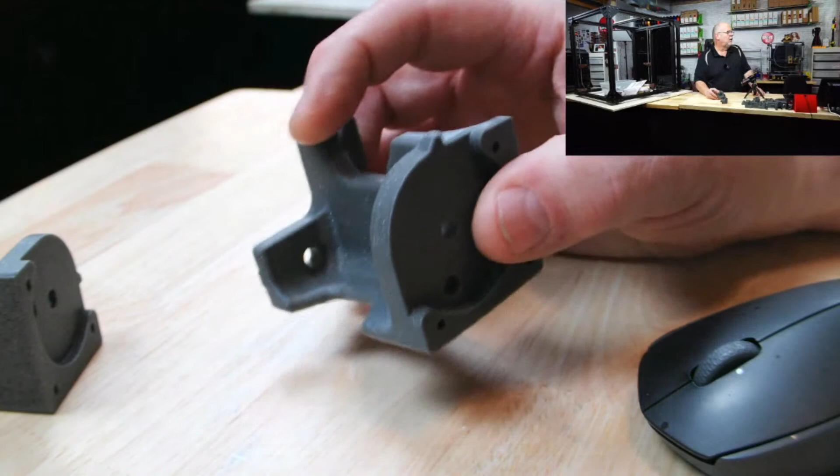Okay, looks pretty good. Took an hour and 20 minutes to run this piece. This is at the standard Voron infill and perimeter settings, etc. Now, the only thing I'm not 100% happy with on this is the first layer could have been a little bit better. This part's still usable, it's fine, but there's just a few little artifacts around the end there.

So I turned off the calibration prior to printing on this one because I figured it was all calibrated from all my test prints I've been doing. And you know what, I should turn that back on, but that's not bad. So there's your first layer. And otherwise, this part looks pretty decent off of the K1. So if we have that one off the K1 and that one off of the Bambu P1P.

I'm happy with both of these parts. Other than the fact that the Bambu took some stuff off of the bed, but I did recently get in a new bed for the Bambu, which is the high temperature plate.

Which is good for PLA, PETG, ABS, TPU, PC, and all that. And then this is the engineering plate, which is also good for PETG, ABS, TPU stuff. So I'm going to probably use this so I won't have any textured PEI coming off of that plate. That should work fine.

But the point is that the Bambu with the enclosure is running ABS just fine. All of these parts you see in front of me, other than this one, were run on the Bambu with ABS, Polymaker ABS filament, and it runs just fine.

So what we're doing is part of this without some printed parts, so it's like a 3.2 upgrade. It's a few modifications. If I put this on here and show you up in this corner, the front idlers are done like that with no printed parts involved. And this is the other front idler. I'm going to try and focus on that for you. So those are done and ready for the belts to go on.

The other parts we've got finished on this is the X gantry is done. It is done, deracked, and it's running slicker than owl poop.

So what we're going to work on tonight is the XY motors up here. We need to get the idlers in and get the motors on, et cetera, et cetera. So I always seem to have something to build.

Well, I create projects too. If you look back here, this is the Trident that we built in multicolor, which has been stripped down to the bare frame now.

So we're rebuilding the Trident because we're printing it in different colors. I think I've decided I'm going to do gray, and the accent color is going to be white. That's going to look really cool, a gray and white printer.

And we're doing the reverse, or upside down, whatever you call it, electronics. So the electronics are going to be on top instead of underneath. We're going to be making a few different things.

This printer isn't enclosed. I could enclose the RatRig if I want, I have the panels to enclose it. The back panel is already on because the electronics go on the back. You can get a hat for this, and you can enclose the sides, but I don't think I'm going to enclose it.

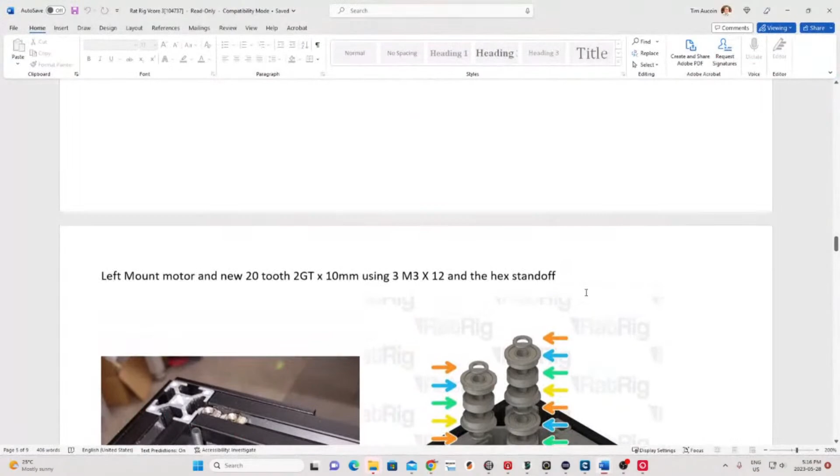Hello, hello, okay, so we're going to be working off of this. I go to this... oops, that's the wrong thing. I am looking for... right here. So this is the little assembly manual that David Wilson had put together for me. How do I zoom out of this? This is in Microsoft Word. There we go.

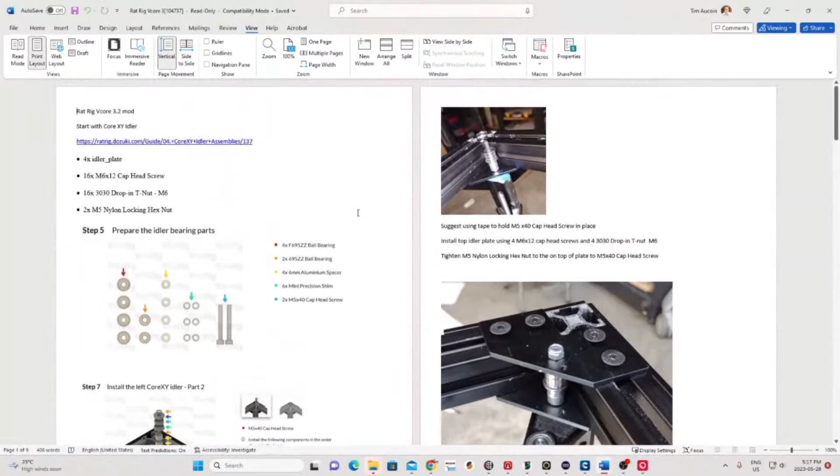So this is kind of the little manual that he put together for me on the 3.2 modifications, which basically, so we've got this part done. This part over here you're seeing on the right is already finished. Those are our front AB idlers, or our XY idlers, I call them the AB motors anyways. Those are the front idlers, left and right, are already done, okay? And now we're going to be working on the XY motor plates, the XY motors, which are the back ones.

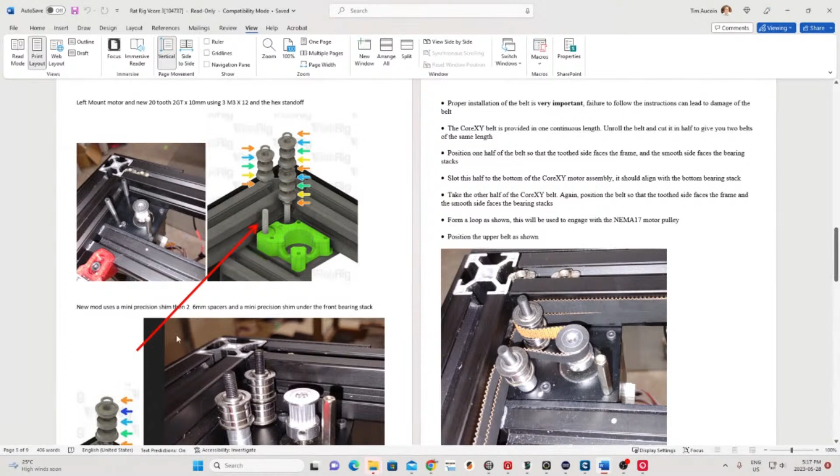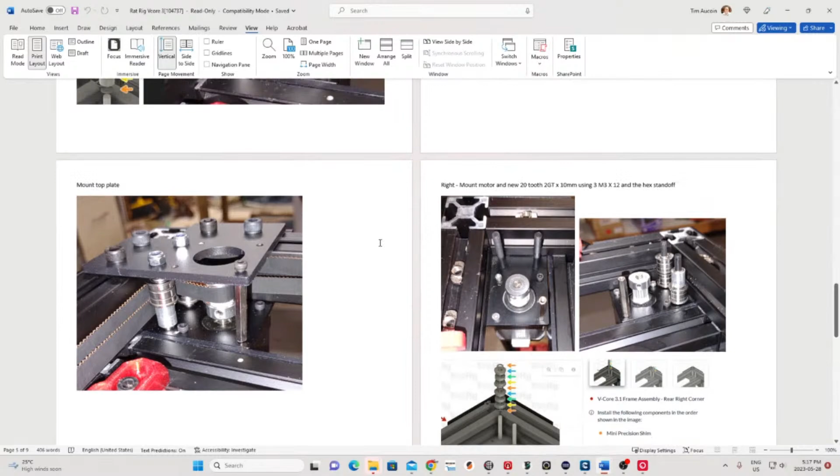So you'll notice that this picture on the right with the red arrow pointing to it, that printed part is no longer going to come into play. That's kind of replaced, and it's going to end up looking like this one here. And then it's much easier to run your belt path, et cetera, because you can run the belt and then put the top plate on. So there it is with the top plate on and the belt run like that. And that's how we're going to be doing our XY motors and belt path there.

So we're going to start working on that guy. Let's see, accent parts, probably okay, yeah I think they would be okay, but unfortunately I don't have any. Man, I thought I had white. I do have white PLA, but I don't think I want to do accent parts in PLA. I have PETG in white from Polymaker, but no white ABS.

Interesting, okay. So without further ado, these are the parts that we need. That one and this guy here. These were parts that I purchased off of AliExpress. These plates basically replace the printed parts that normally go on here.

Now, I'm totally winging this because I had to order some spacers. So we got a whole bunch of different spacers. And while I was ordering spacers, I ordered every kind of spacer under the sun you could think of. So we have a bunch of spacers.

We have our new idlers here. We ordered a little different size idler, our geared idlers, sorry, geared teeth idlers. And then let me get all the spacers out of here. We have our new belt from our 3.1 upgrade kit. So we have some new belt material here as well.

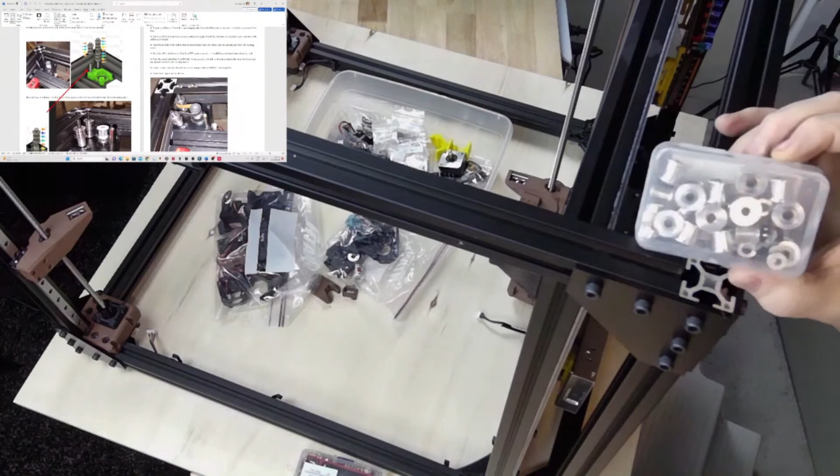But for the most part, you're going to reuse a lot of the idlers and bearings from the original build, because they did not include new idlers and bearings in the upgrade kit. I don't think they did. Let me double check that to make sure I'm not being a liar here.

But yeah, these are all the parts. This is for the EVA, the hot end. And I've got to decide what I want to do specifically on this hot end.

And then all the rest of these things are all the old screws from the old build I kept, even though they do include a lot of new hardware in the upgrade.

Actually, we did get new bearings - sorry, we did get new bearings. These are the flanged 695ZZ bearings. But the idlers are pretty much the same. So we have some new flange bearings and some new 695ZZ unflanged bearings.

And then we got a lot of new bolts and screws, which they don't really tell you which ones you're going to replace, but it doesn't matter - bolts are bolts and screws are screws. So yeah.

A lyre is a very pretty little harp. Oh, I see what you're saying there, Andrew. That's right, you're my comedy relief on the channel. Andrew, keep it up, keep it up.

So I am going to pull up and have a look. I need to zoom in - let's go 200% on this on my screen so I can see exactly how he has done his bearing stacks here. Now I think I'm going to have to fiddle with these a little bit, but we'll see what happens.

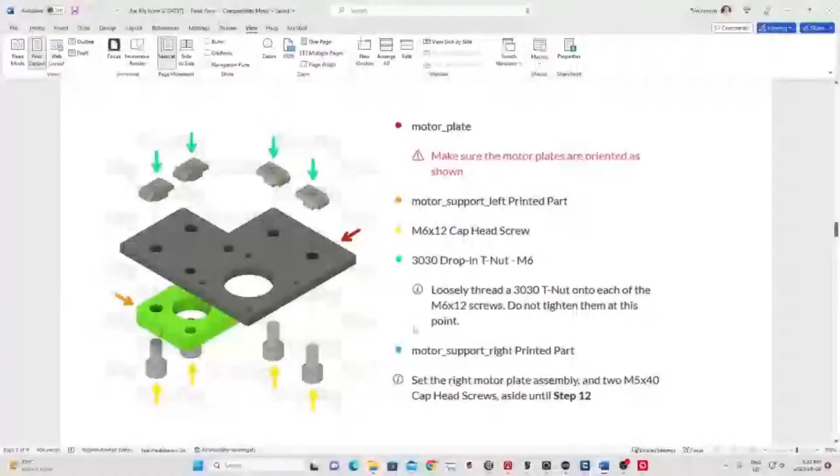So first thing I'm going to do is grab one of my motors. I've already got the - if you notice, let's see, which drawing? So underneath, right in this one here. This is a motor mount support, this green part here.

This has been reprinted in the brown because I'm doing brown, but that's already attached. And this bottom plate that you're seeing right here has already been attached on both the A and B. That just didn't come off from the - where can you find the document for the build 3.2?

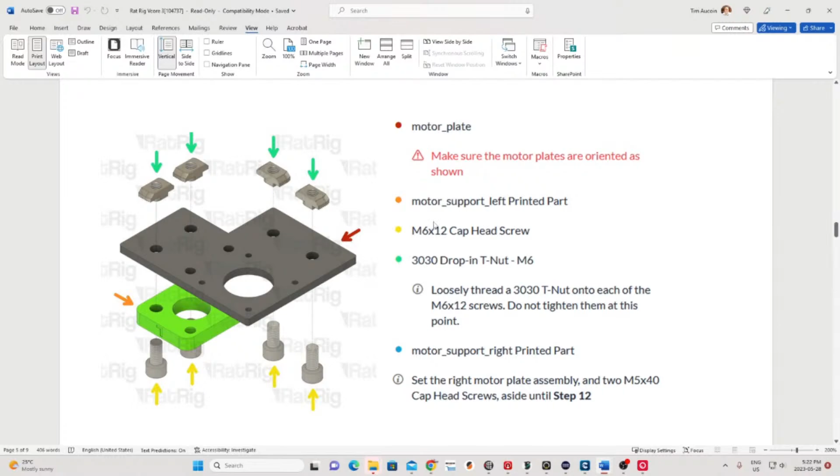Check on printables - I'll see if I can find it during the stream. I know David Wilson had done these documents and posted them up on printables. I'm not sure if he's got the most up-to-date ones up there yet. He may pop onto the stream a little later as well.

Different color may seem softer than the other, if that makes sense. A different brand? Oh, same brand ABS, but a different color. Oh yeah, I think depending on the formula to make the colors, you're going to find some differences.

So we're going to start by putting on our tooth gear on this motor, and then we'll be able to adjust that as we need to. I'm going to see what the difference is, because I kept all the other tooth gears here, and I think these are just a little bit bigger, if I'm not mistaken, but let's just see.

Yeah, they're about 1 millimeter taller on the ones I bought versus the ones that came off of it. And I believe it's the same - yeah, we're about 1 millimeter bigger. And I think it was to give the belt a little bit more clearance, which is why we've done that.

So what I'm going to do is grab a couple things over here, grab my wrenches. There we go.

And the first thing I'm going to do, if they're not already on here, is add Loctite. If I can find the right size key, I'd like to add Loctite to these grub screws. There is no Loctite on these, so I'm just going to add a little bit to each of these. Let me grab myself a rag, because as we know, Loctite can be a little bit messy. So let's put a little bit of Loctite on here.

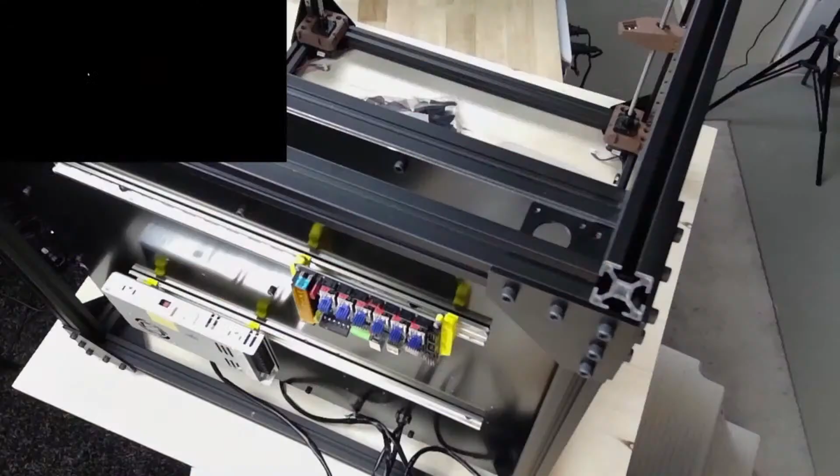Okay, M3x12s. We need our blue key here, which is our 2.5 millimeter. Let's give you an overhead view here, and we're going up here. Oh, and wish me luck.

We're going to make sure the plug faces the right way, facing in towards the frame so that when it goes down to be wired, I don't have to explain what I'm saying there. The motor's going to come up, and I just want to make sure I get the right screws in the right spots. The standoff is going to be on this corner here. So we'll get one of these going first.

M3x12s are too big. Unless these are longer than 12s. Okay, those screws are too big. Let's see - oh, maybe that's from the old manual. I'll bet that's because I'm doing a different version.

3 M3x12s and the hex standoffs, M3x12s. Well, these have got to be - let me just check the size of these. Did I have these in the wrong bag? No, these are 12s. But they're way too thick, way too long. Huh.

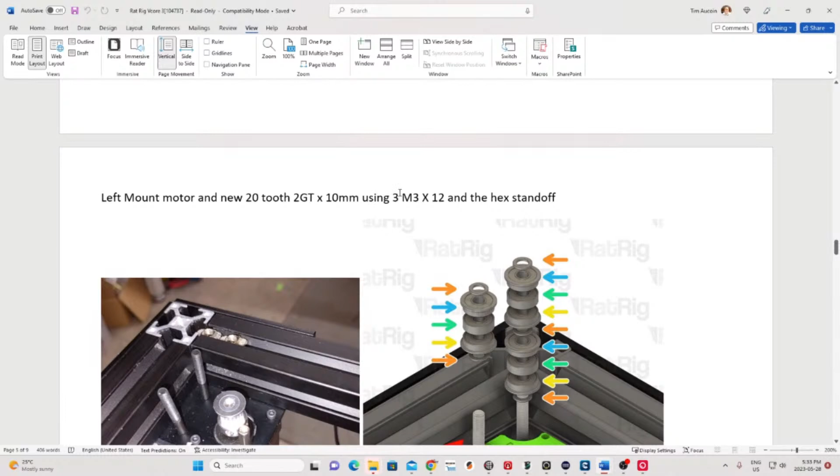Yeah, no, well - you see, it might be that he has altered these instructions. But if you look here, he says left motor mount and new 20 tooth 2GT, 10 millimeter gear, right? And 3 M3x12s and the hex standoff. But it could just be different motors too, right? That could be the thread depth in the motors.

So I'm going to try 8s. 8s should be fine, or 6s should be fine. The 8s were a bit too long, so these 6s should be fine to hold this in. I'll chat with him about that when I talk to him again. There we go. 6s are definitely the way to go - there's plenty of thread in there.

Get these lined up. I just got to loosen this one off a bit until I get these other 3 started. There we go.

The MCU - yeah, does it ever? Well, the electronics themselves look crazy small in the back of this thing compared to the space. There's more - you could put enough electronics to run 2 of these with all the space that's on the back of this thing.

Okay, so there's my - okay, so there's the motor in.

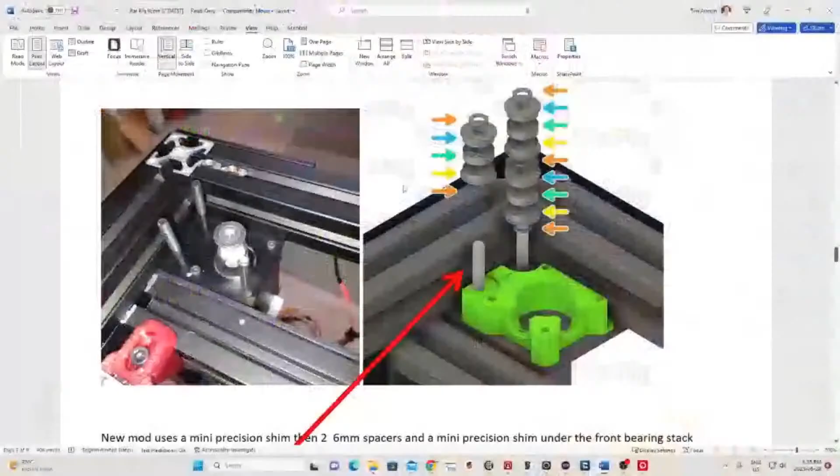Okay, and then what's going to happen, just so you get the idea up here, is we get our bearing stacks and everything in there, and then this is the upper - oops, I think this is the other side. Oh, let's get the proper piece here. And then this piece will go on top and will hold everything in. So, this is versus all that printed part that you have in there - so much easier to run the belts and everything like that, and much simpler. But it's just a matter of getting the proper depth on the stack here. So this is what it used to be.

So the new mod uses a mini precision shim and then 2 6mm spacers and a mini precision shim under the front bearing stack. This is what the new mod looks like right here. So we're using the same spacers here, and it looks like there's a mini shim underneath and a mini shim in here, and then our bearings, and then shims up top.

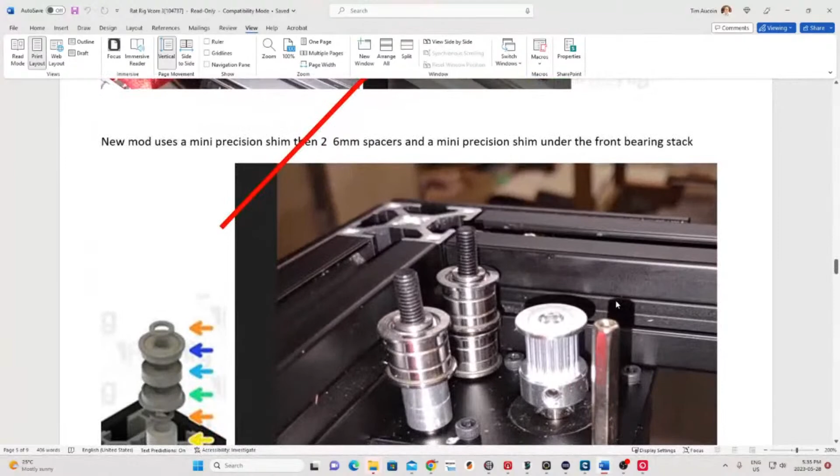Okay, I don't know what size this hex standoff is, but the hex standoff is going to have to be - this is the part where I'm not completely sure, because he doesn't give me complete instructions as to the length those screws need to be, unless those screws... let me just double check here, because I have the - oh no, I don't. Or do I?

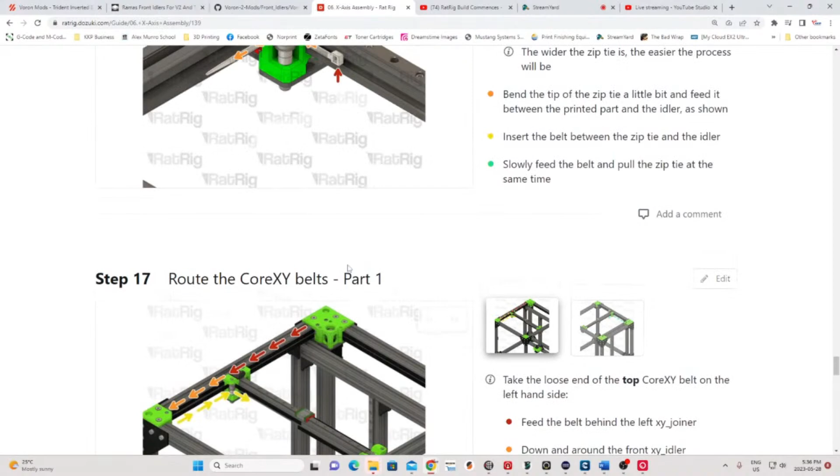There we are. Here's the original 3.1 upgrade instructions. I'm going to check and find the length of those screws. Is this the right? No, I've got to go back. Sorry, guys.

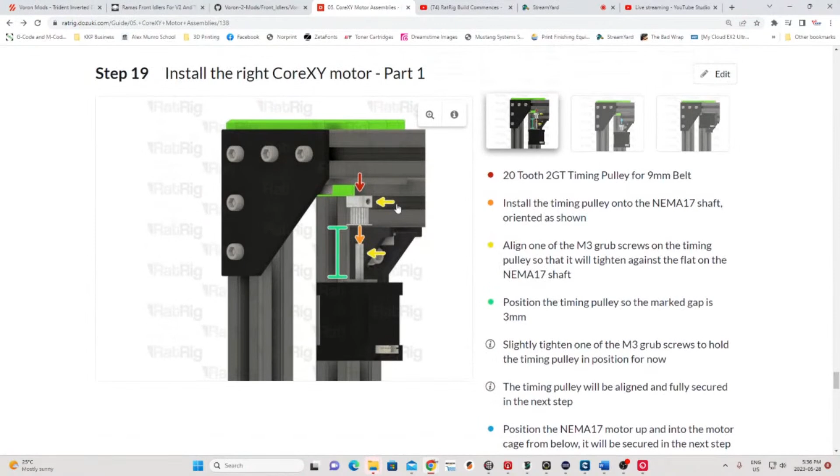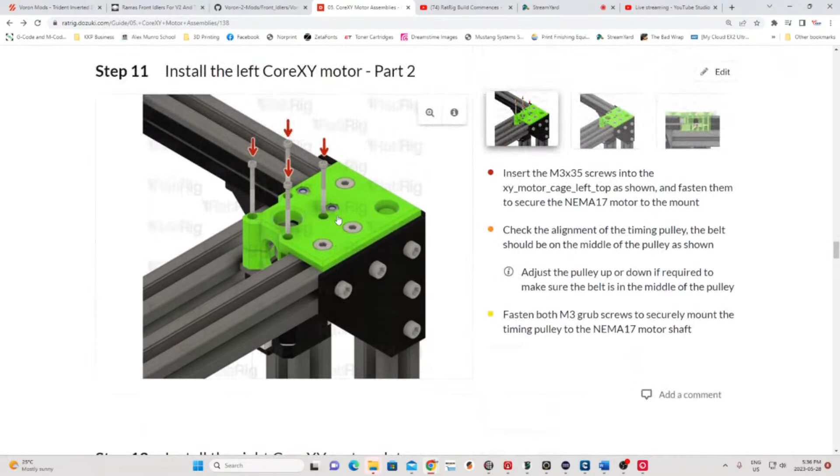There we are, so these are the ones. This is the way you normally do what we're doing right now. Okay, now let's go down to the left one, because we're working on the left one at the moment. So that's what I was telling you has already been done. We have the motor alignment, or the whole plate assembly, already in place underneath. And it looks like we're using 35mm screws.

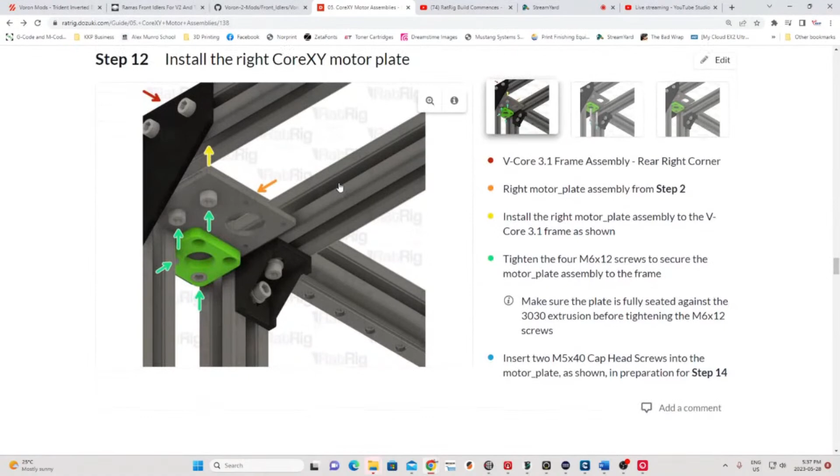See, these ones go down through the top with the bearing stacks, whereas the other ones are going to come up through the bottom for the bearing stacks. So those are 35mm M3s that we're using for all the bearing stacks. So 3 of them, plus our little hex standoff.

Okay, I think so, we'll see. Let's try and find those pieces. Hey David Wilson, glad you joined. I know, I'm kind of just winging it here.

So now we're at the point where I need to decide, and I think those are M3 35s we got to put in under. Let me just check this whole size. Yeah, no, these ones are not M3s. So let's find this hex standoff.

I'm not 100% sure what size this has to be. Oh man, I'm going to trip on this if I don't take those slippers off. Hey Jose Ferreira, how are you sir?

So I bought a variety pack here of these hex standoffs. And let's just see, where's my calipers? We're kind of winging it here as we go, guys, just so you know. But I'm sure David's going to reach out and say, no Tim, that's not what you want to do.

So these are 20 millimeter, and then I have extensions, so I'm able to put whatever length here. But I'm going to see M5 by 40 bolts for those. Is that what those are, David?

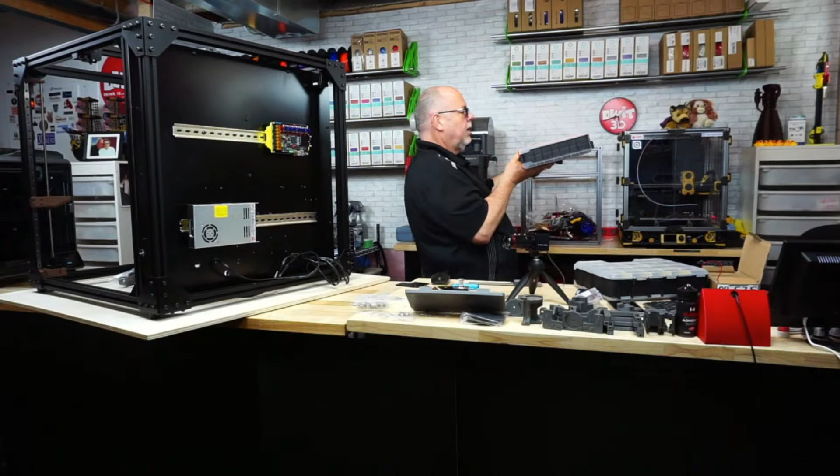Those are my M2s and my M5s. Is it my 45s in here? M5 by 30s. Huh, I know I have some. Oh, there we are. M5 by 45s right here. So M5 by 45s, we're going to need 4 of these eventually.

And M5 lock nuts, and I think those are in my other thing. Let's just make sure there's nothing else I need here. M3 by 8 cap head screws, which we've got. I think that's all I need out of here for now.

So if I take 2 of these, let's just go back over to the overhead here. So now this is our corner hex screw that goes in here, like so. And then these M5s, come on.

Gonna have to grab my wrench. No, I need my allens. And I believe that's Mr. Pink. No, wow, it's Mr. Yellow. There we go.

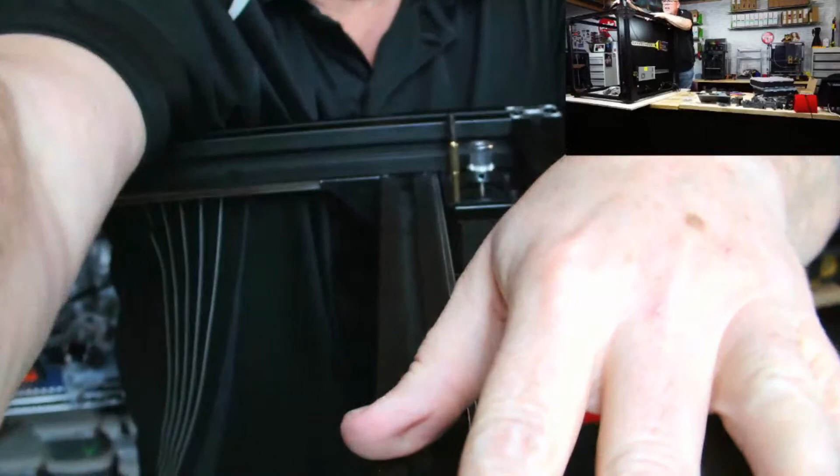But hi. I think if I put this, let's just play camera guy here for a minute. But I think if I put this like this, and I can then go like that, the camera's pretty stable right there. There we go. And then you can kind of, now if I zoom in, there you go, and you can kind of get an idea.

Ah, that's a little better. And then maybe raise that up a little bit like that. There, then you can kind of see what I'm trying to get you guys to see here. If I move this back down out of the way here, because you don't really need to see my ugly mug. There you go. Okay, that'll give you guys a little better view up there.

So we got that one in. We're going to get one more of these M5s in up here.

I just lost my chat for some reason. Why did I lose my chat? Oh, don't you love live streams? Where's my chat? There it is. If it threads, it won't drop out. Yes, that's true. Hey, Mika, Steve.

Let me just check that email you got, David, and I'll open those instructions because I know you've been working on them. So let me open that up. Where's the email? Where's my email? There's my email. And let's see.

David Wilson, look at that. And double click that document to open it. Come on, we can't do this because dialog box is open. Please close the dialog box. Oh shut up, there we go. Oh, there we go. Okay, perfect. Okay so I can show this off.

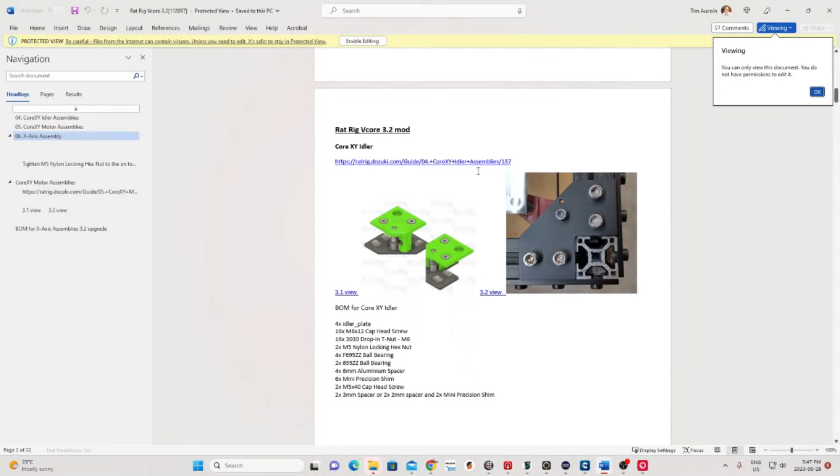Here's what David just sent me, RatRig 3.2 mod. Okay, so this is great, and I appreciate David what you've done in putting this together. That's excellent. So as I say, we've already done these front idlers, so we've eliminated the plastic parts on the front. Okay, and that part is already done. We haven't run the belts yet, but we will.

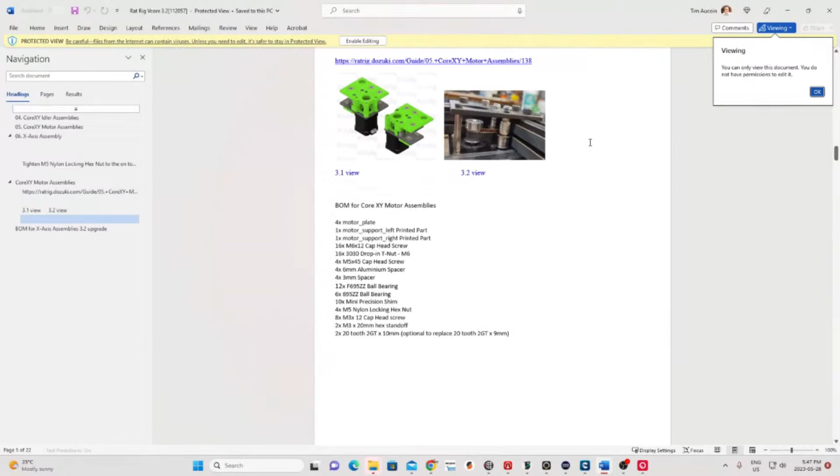And now we are working, this is where we're working right now, right at this step right here. Okay, so if I close that, that'll make that window a little bit bigger. And if I go view, and I can zoom that to 200%, it's going to give me a nice view. Look at that, I like that view.

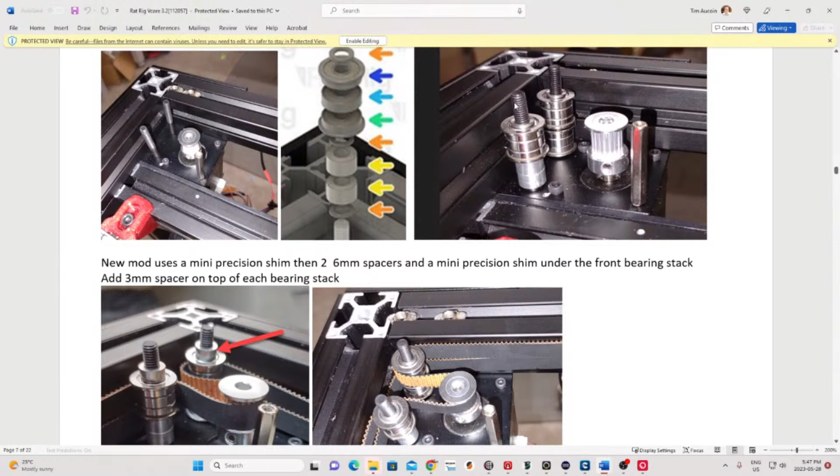There we are. So what we're doing now is putting in these two M5 bolts right here. We've put in our little hex standoff right here. We're going to put this other bolt, and then we're going to build these bearing stacks just like he has shown right here. So it's perfect, it's great, it's wonderful.

That was my DeMille camera for all the close-ups. Oh, you're speaking this one here. Yeah, that's a great camera, I love that camera. So okay, let's put that one back on.

While I go ahead and put this other bolt in, it's going to come in from behind. It's just a tight fit, I've got big fingers and it's a tight space back here. And here we go, just up here. This one's got to kind of be threaded in, but it's good that it gets threaded in because that means it's not going to fall down.

I keep wanting to reach through this back panel to help me out. There we go. Okay, so you're going to see a bolt rising in a minute, or you might or might not, right in front of my finger here.

See? There it comes. And I can even read chat from here. Cecil B. DeMille. Oh, that's what you meant. Okay, Cecil B. DeMille. Is that too bright though?

No, I think that's okay because I can darken that a little bit. Let's see, more cinematic drama. Oh, there we go, that's a little better.

Okay, now that we have that done, we are going to look - I love that I can switch so fast - we're going to look at the stack.

So we need a shim, okay, so we need a shim, 2 of those bearings, or 2 of those spacers, a shim, 2 flange bearings, a flat bearing, and another shim.

Now, I want to make sure - it makes belt replacement so much easier. Oh, it definitely does, because you can put the top on after, right? Whereas with this one here, you can put this lid on after you feed the belts. Whereas the old version, you actually had to have the top all assembled, and you had to feed the belts through the tight spaces.

So this is awesome. Now you had mentioned - oh, I see. So on the top, the new mod uses a mini precision shim, then 2 6mm spacers and a mini precision shim under the front bearing stack.

Okay, so I think I see what we're doing here. Well, you know what, it's easy to do because yeah, I'm just talking through my mouth and not knowing what I'm saying. Okay.

Okay, so where are my spacers? So let's just dump this out. So we've got the 20 tooth idlers in here that we've replaced. So we need these guys, we need these spacers, which I believe are the 6mm spacers. Let's get all these out in handy. This is all the stuff that was taken off of the original build when I stripped this down.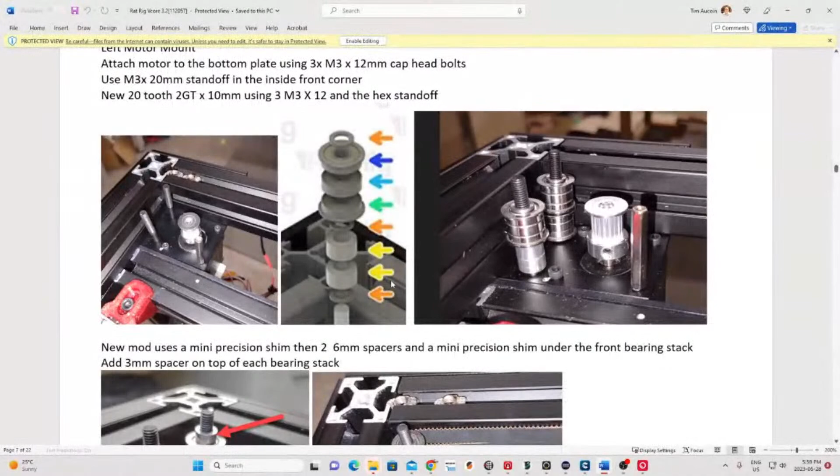Scroll down a little on the instructions. Oh okay, so here's where we are in the instructions so far - new mod uses, two 6mm spacers and a mini precision shim under the front bearing stack, add a 3mm spacer on top of each bearing stack. Look at that, all I have to do is read the instructions, but you guys know me and reading instructions, right? I learned my lesson with the Voron builds about reading instructions carefully.

Okay, so there we go. So now we're going to go up here. 3mm spacer - oh look at that, they even fit. 3mm spacer. Now when this goes on, this should, if I put it on the right way.

Come on. Oh, this is the wrong one. No, there it is. Yeah, oh yeah, that's perfect. Look at that. Hey David, that's perfect, that's really bright. Now that's a little better. Okay, cool, perfect.

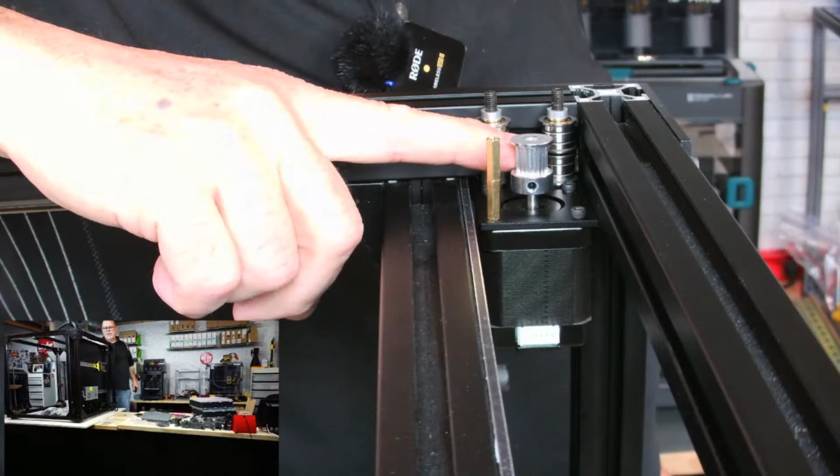Okay, so now that's almost lined up. Yeah, that'll line up once I force that over. So really, we're using 3 points to solidify this, and then this plate is going to be secured here. But I'm not going to put this plate on yet. I'm going to keep this built just as it is, because now I need to align this gear properly with these, make sure it's aligned, and then tighten it down. We'll do the other side, then we're going to run our belts. Other than, of course, we don't have the EVA hooked up, but then we'll run our belts, and then we can put these caps on.

When did you learn reading? Hey, good one, Mike. Ouch, ouch, oh, oh, oh. Ouch. Make sure when you step off a step stool, you do it right.

So what's happening up there is these little hexagon things, I have to kind of push it in order to line it up with that hole, but it doesn't matter, all it is is to hold that plate in place. I do think I'm going to need to find some more shims, although I think these are all the same size. So I've got 1, 2, 3, 4, 5, 6. Oh, I may have enough. Let's just see, let's move this off the table here real quick. Don't lose any parts. Good. Did I lose any parts? I did, I dropped a shim. Oh anyways, that's okay, I'll find one.

So now we're going to turn this carefully as to not disturb my camera. There we go. Okay, I'm going to move the camera over to the other side. You guys ready to get dizzy? Ooh. Oh sorry, how's my dental work look? Come on. And balance.

And that's almost there. Okay, now we just got to aim that the right way. There we go. Whoops, up a little higher. Up a little higher, a little bit lighter. Let's lighten that up a little bit, and focus it a little bit. There we go. Okay, now we're ready to start the other side.

Okay, so got our motor. We've got our 20 tooth gear upside down on this because this is the lower belt path. We need M3 by 6s, I don't think I have enough. No, I don't. I can use the button head cap screws, they're just as fine. Now, do the instructions say, because the instructions initially said M3 by 12s.

Oh I see, okay, blah blah. Anyways, for me it's got to be M3 by 6 for those motors. Yeah, it says M3 by 12. So David, you might be able to answer this. Right motor mount, so we're going to do the right motor right now. Attach motor to the bottom plate using 3 M3 by 12 cap head bolts. M3 by 12s are way too long, they bottom out on this.

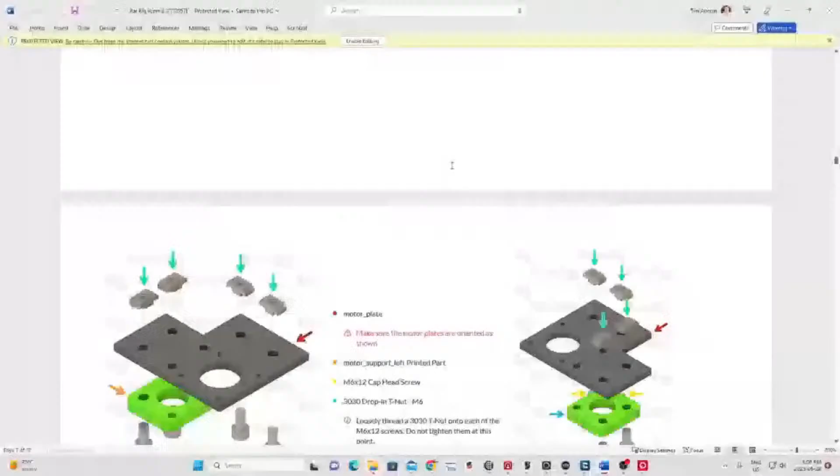Are you using the printed part? No. What printed part? Should there be a printed part between the motor and the plate? Don't tell me that now. Because let me look, I don't see a printed part under there. No, not where the motor goes. There's a printed part, so I see a printed part here, this green part printed, which is the motor support, but the motor does not go in there, that goes beside the motor. All right, so there's no printed part under there at all. So right there under the flat plate is the motor coming up through here, and those are the 4 holes. Well that one's hidden, but these are the 4 holes where the motor is being mounted to, and there's no printed part under there, unless I'm missing something. I've got the motor supports in there.

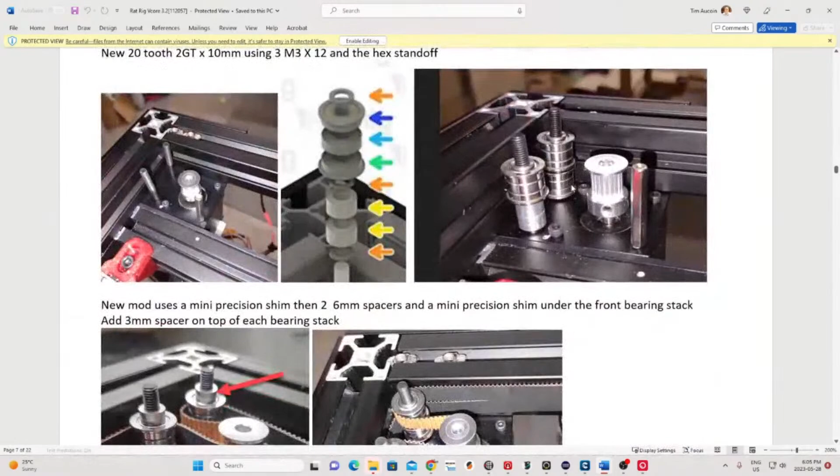Yeah, the motor support is, I think, the part you're talking about. But no, I'm not using... I gotta go get to where I was. I think I was on the other side now. Here's the other side. Yeah. So it's just going flat against the metal, holding the motor in. So 6 millimeters is plenty.

So I'll just use button heads. All they've got to do is hold the motor in, which is fine. I could put Loctite on these, actually. I didn't put them on the other ones. I could always loosen them and put Loctite because I don't want them vibrating loose. That's my only fear. And for some reason, the button heads use a smaller driver than the cap heads.

I don't have any 6 millimeter cap heads. I thought I did. I have one. I'll use one of them, and I'll use the rest as button heads. And then when I get some more cap heads in, I will replace them with those. So let's go to the floor cam again.

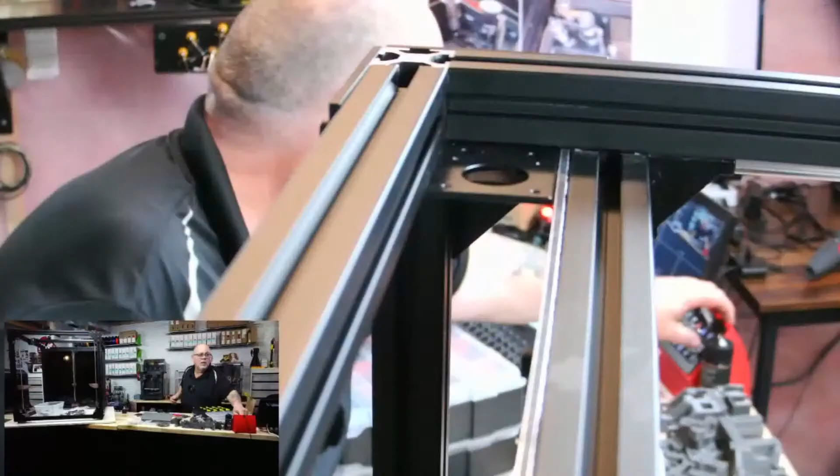Here we go. Okay, so again, I want to make sure that the electronics port is inside. And then this comes up under here. Whoa. And like so.

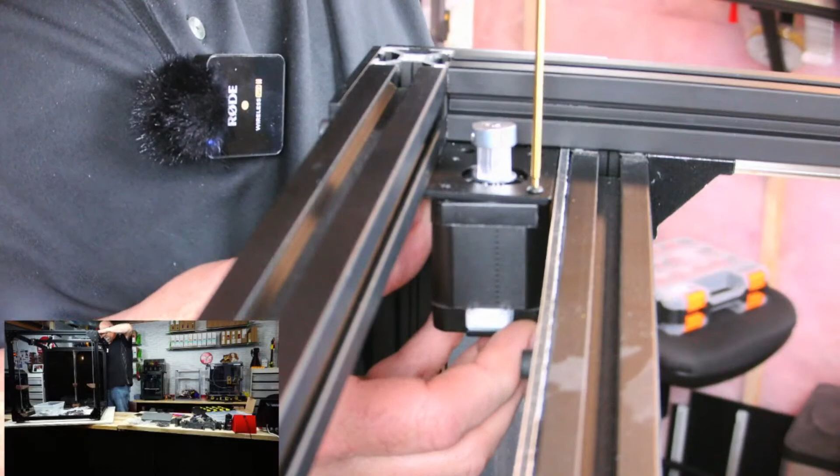I don't think it makes a difference, button heads or cap heads in this particular case. Okay, and let me grab the last one here. Oops, not that one. Oh no, okay, I got one in the wrong spot. This one's got to come out. And this is going to go in this one, because this is where the hex thing is going to go. There. This basically is mirroring the other side, is what we're doing.

Okay, so our motor is secure in there. And then our little hex standoff is going to go in here, like so. Okay, we have that secure. Now we need our M5x40 bolt, 45 bolts.

You don't know where you came up with 12 millimeters. I tried 12, I tried 8, and I said, no, no, no. Then I thought, well, David's going to come on after and correct me because I'm obviously doing something wrong. But that's okay.

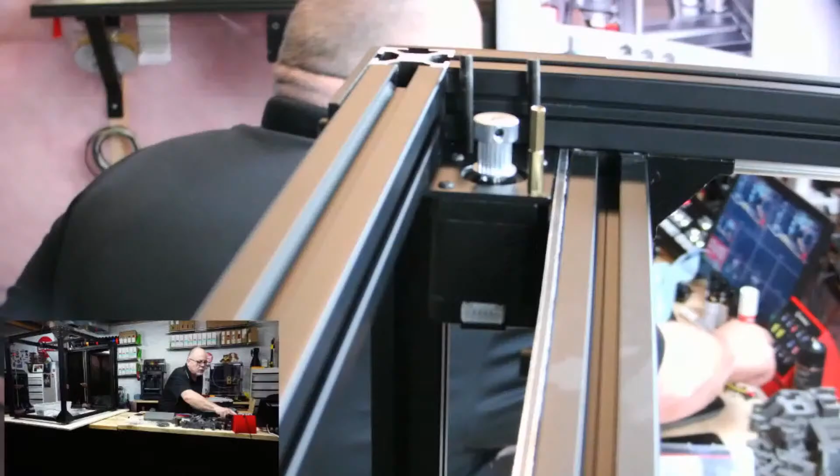Why does that look out of focus right now? There we go. Okay, so we are on this side. So the one opposite this, we want to go shim, okay, and then we're going to go flange, bearing, and flange, shim.

Come on. And flange, bearing, flange, and shim. Okay, that's that one. And then that one's going to need a 3 millimeter spacer. There we go. Okay, and then this next one, which is the inside one.

Oh, did I just mix that up? I just mixed that up. Hang on a minute. I mixed that up, okay hang on. Let's take those off, that's all I needed there. Okay, and then that one is going to go boom and boom. And then a shim. Okay, and then the 3 mil spacer. Okay, I just mixed these two up is all I did.

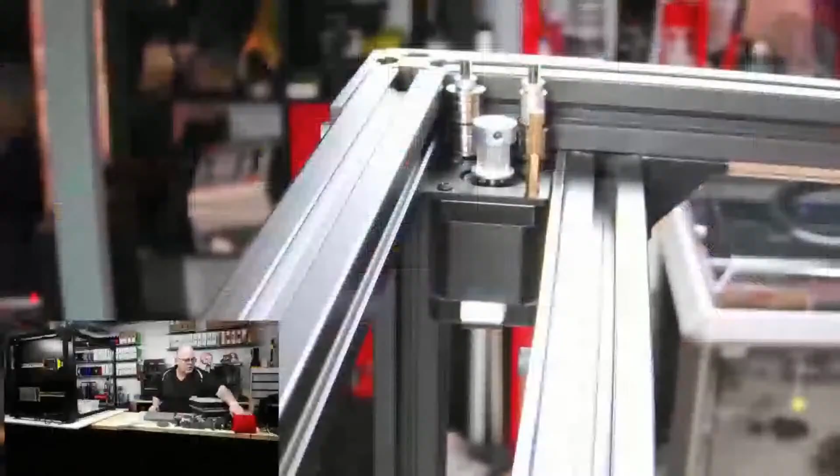I'm just going to figure out how now. Go ahead, say it. I'm going to try. What kind of a view can I get on this to check if I could only fit my head up this gap here. Let's just see. Maybe from this angle here. Yeah, okay, right there. I wonder if I can reach across. Okay, from this angle here. Okay, I'm going to put this on the floor cam so you can't see me fall.

After the top is on and the belt tightened, I can adjust the drive gear. Really, I can reach in for that? I'm just going to get it close right now. I just want to get it a little bit close. Okay, it helps if I have the right size hex key. But I can actually see it really well.

Okay, that's close. Now the other one, the top one, this one's got to go up a little bit. So, right about there.

Whoops, bumped the camera. Where's the other screw? There's the other screw. That's the same screw I just did. There's the other screw.

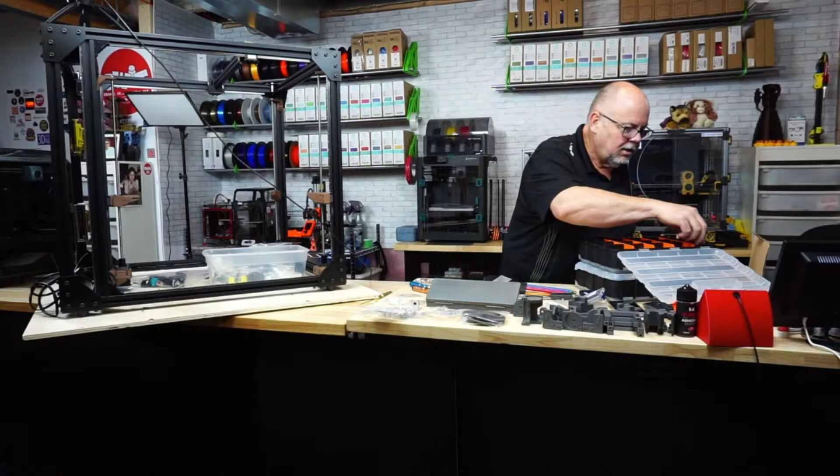Okay, so in here. One there. Where'd I just, oh right, duh. M6 by 12s. I got a lot of M6 by 12s.

One of the best things I ever did was get these little kits to sort my screws. Saves me so much time looking. Okay, and M6 by 12.

Come on. A lot of these came off because I'm not putting covers on these yet. So I'm sure a lot of these M6-12s came from my side panels.

Now, where are the rest of my M6 hammerheads? Right here, okay. Can never have too many bolts and hammerheads.

You know, I don't even have the window open. I have no idea how many people are even watching this stream right now, and I don't care. Well, I do care, but I don't even, because I don't have the YouTube window open right now.

Okay, so that one's prepared, and this one's prepared. So I think, if my spidey senses are correct, the next step is to run the belts. Let me just check Mr. David's instructions just to be sure I'm not missing something. We got the bearing stacks done. Okay, and then run belts as shown, then mount the top motor plate.

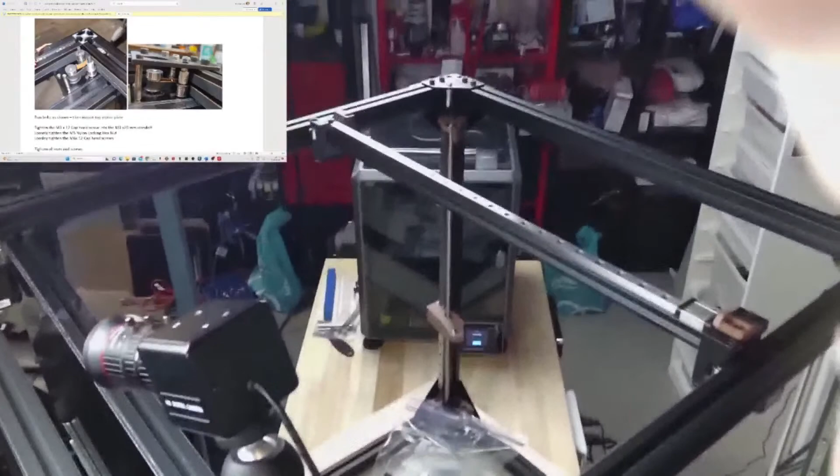Pop this one off of here. Let's move this off to the side. And this one, if I turn it over this way, there, and then you can kind of see, because this is right here. Yeah, then you can kind of see what I'm doing here.

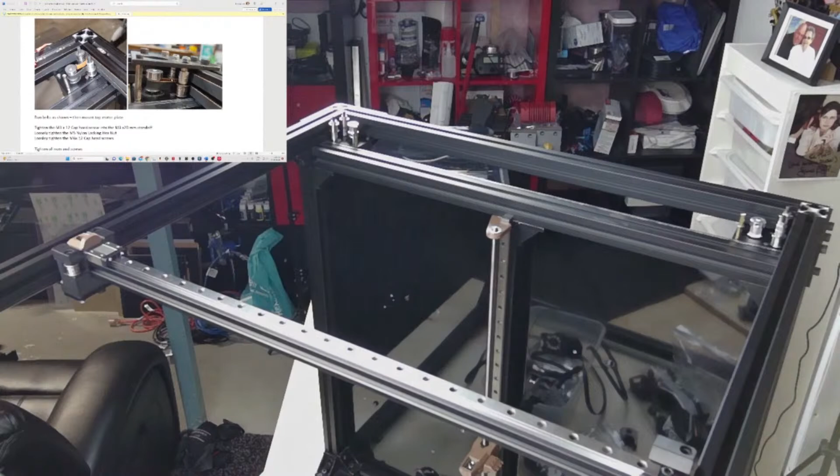Okay, so I'm going to look at the instructions. So this one's going to come in. So this is the bottom one. This is going to come in from the bottom. This is going to come in, around, and around and down to the bottom on this one. So this one's going to go, oh man, that is so much easier, Dave. Oh, holy cow, look at that. Like, look at that.

Then we're going to come around to this side. And then we're going to, holy cow, bottom belt. So this one just skips right around to the bottom of this stack here. Oh man, this is going to, I'm like, come on, get down to the bottom bearings. Come on.

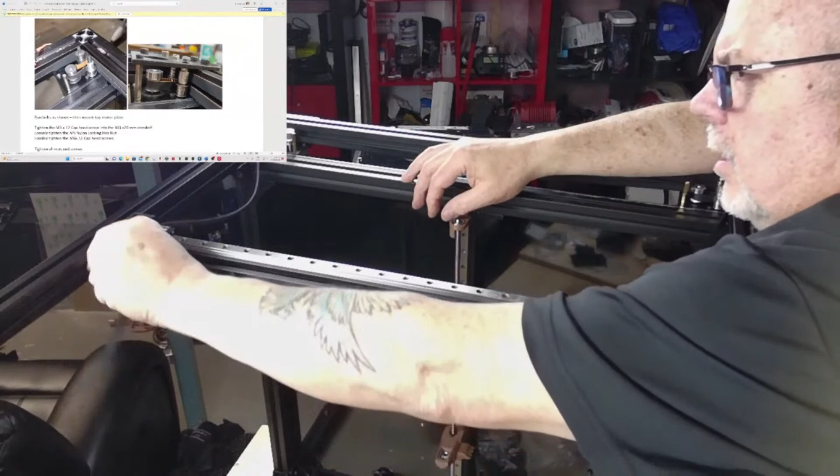Why? Something looks off on the x-axis here, something looks off here. Because that's going to come in from behind on the bottom. This one's going to come in from behind on the top. Okay, hang on a minute here. Doesn't take much to confuse me, so I'm a tiny bit confused right here, but that's okay. Holy cow!

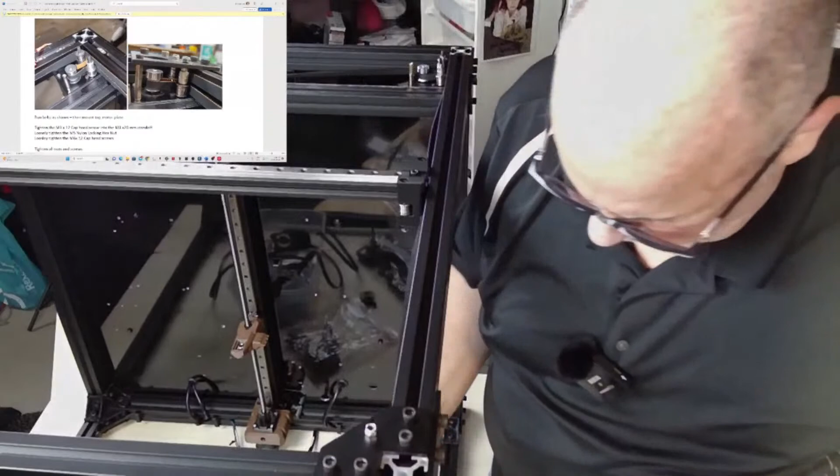Come right through here. Okay, let me just keep this going because I have a feeling. This is the tricky one. I guess I didn't have to put these top plates on before I fed the belts because I can't seem to get the belt to go through here too easy. So basically what I'm looking at is this front one. No, the camera's not showing where I'm looking here. Hang on, if I do this. There we go, this front one right here. I'm trying to run this lower belt around, and I guess what I should have done was not put this cover on before I ran the belt through.

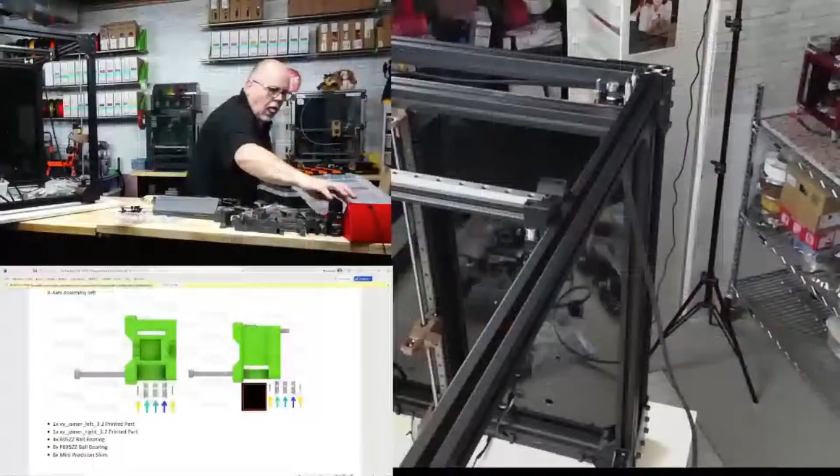What did I do? Okay, well let's pause. Let's pause. Okay, so let's go ahead and pause. We've got the belts fed through the back motors, no problem. Okay, so we're going to pause for a minute. Okay, let's pause for a minute and breathe. Make sure I got the right proper X gantry part printed here.

Is the 3.2 version, hey Maker Viking, Thomas, how are you? Is the 3.2 version different than the 3.1 version, David? Okay, so let's make sure that I didn't screw that up.

Okay, right. Okay, let's just see. So on our right, we have the front one to the lower. Bottom one is the upper, or this one is the upper. Okay. And then we have on this side, we have the upper over here and the lower over here. I think, look at the bottom printed mounts. Bottom of the printed mounts. Okay.

Okay, well, what I'm going to do, let me hang on a second here. Okay. Could just be me overthinking here. Oh, I see. Okay. The way they attach to the 2020. Oh, I see. Okay. With 2 screws here.

They look the same. I think they're the right ones. I think they're the right ones. Here, I'll show you underneath. Boom, boom. Let me just show you underneath here. So there's the bottom of my right side. And I'm looking, yeah, there's the bottom of my right side. And I'm looking at your image and it looks correct. And then, of course, the bottom of the left side.

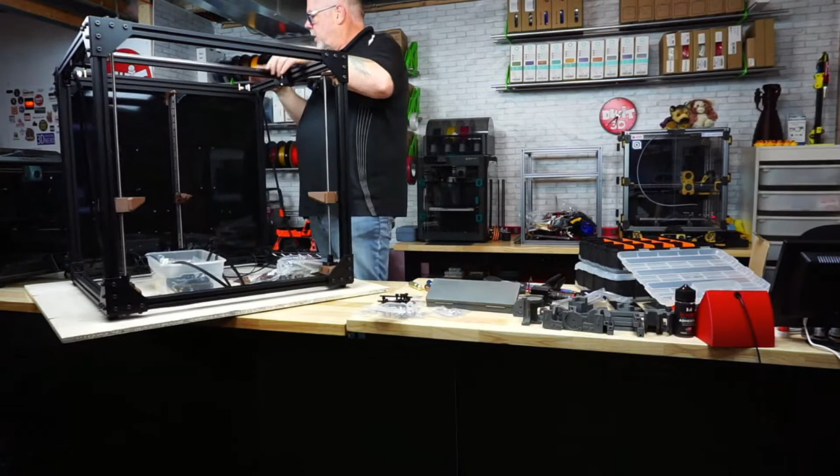And I think those are correct. So I think it's just me wrapping my head around the way the belts loop around these things. Let me get up here and have a quick look and think about this for a second. So we have our bottom belt coming out of here. We bypass, come through here, around this one and back through here. Then it's got to go right through and out, come in behind the rail. So I think we're okay.

Let me just see if I can't. Is this bottom one bypassing through here? Come on. Okay, we come through here. Then we got to come around this front one. Go down this page or so in the instructions. Let's see. Yeah.

Oh, they're coming out the front. Okay, so maybe that's going to come out the front on the bottom, and that's going to come out the front on the top. But what is the bottom idler?

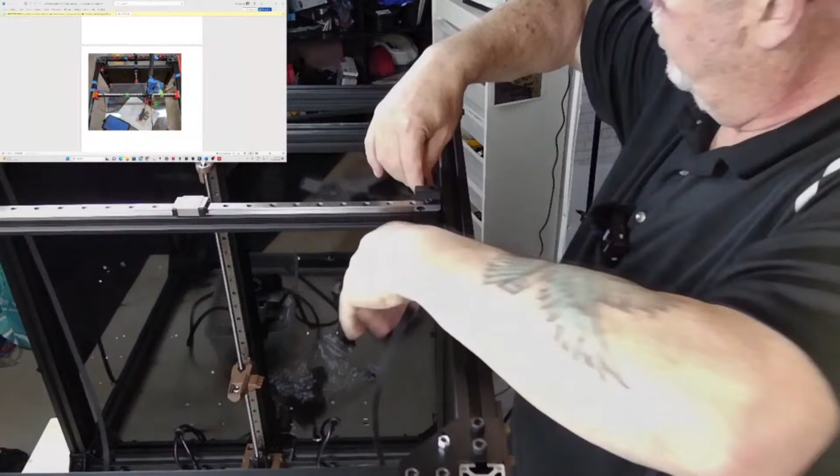Okay, so we're coming out of the lower belt here. We'll just get it around the front idler. Let's come through here. Not worry about, as David said, let's just get it through the front and then we'll worry about that after.

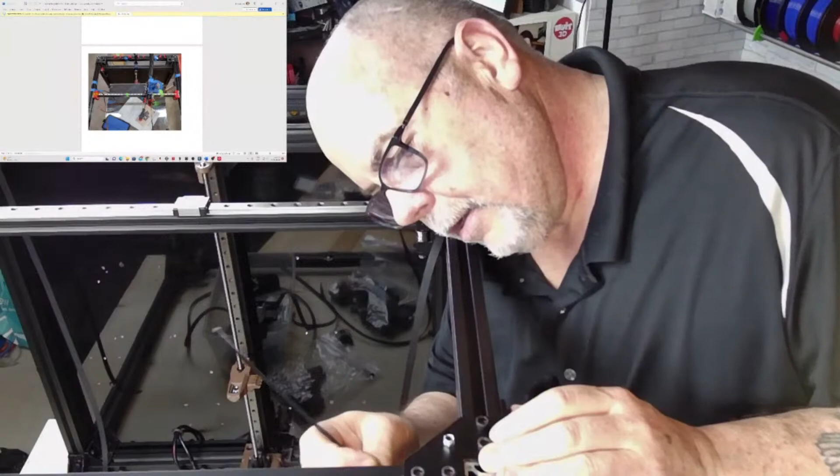Let me grab a zip tie. Okay, use the old zip tie trick. There we go. This works every time, well, most times. There we go, okay.

Get it down around that idler. Well, I'll be, okay, we got this side through. Let's go get the other side through. Not worry about the X gantry right now. Okay.

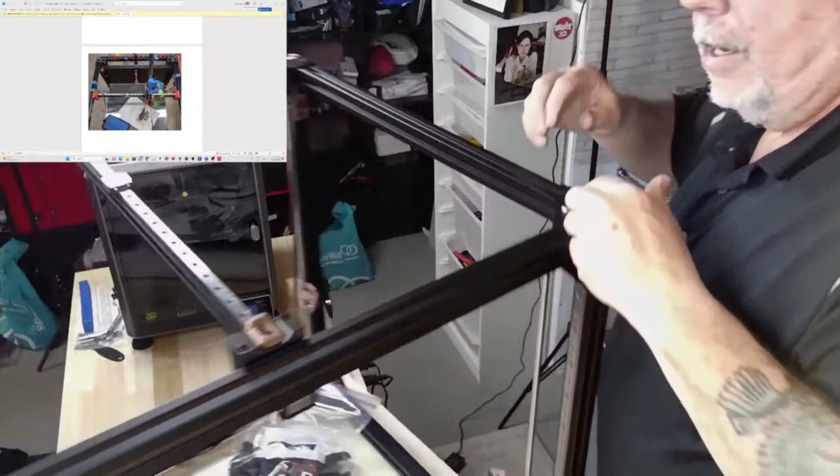So we lost our loop here. Oh no, this is our lower. Okay, that's okay. Ouch. Man, I swear I'm getting slivers from this belt. Probably the steel reinforcement in it.

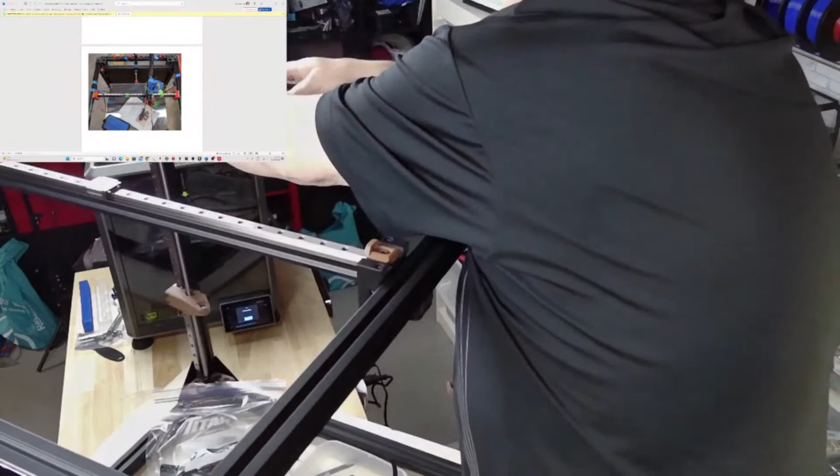Okay, let's come through here. Oh, man. Take it back through the X bearing stack. Oh, I see what you're saying. This one didn't stay put.

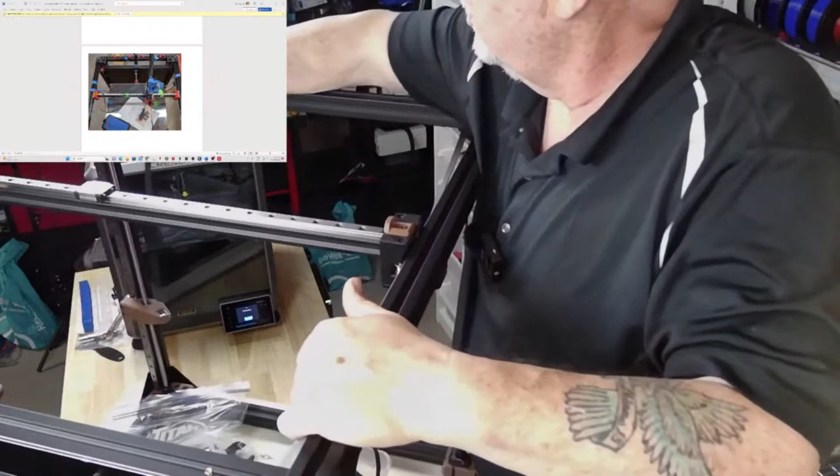Well, hang on one second here. I'm only coming around the front on one of them. This one's got to come around. Okay, hang on a second. This is what's going on with me, is I'm thinking too much. This one's got to come back here, and this one's got to go through and into the back, because this is the lower belt, and then the upper belt, and then this one's going to come back through.

I am so friggin' confused, but that's okay, it doesn't take much to confuse me. What I need to do is just look at a belt looping diagram, that's what I got to do. But this one's going to come through here, and this one's going to come out the back. And...

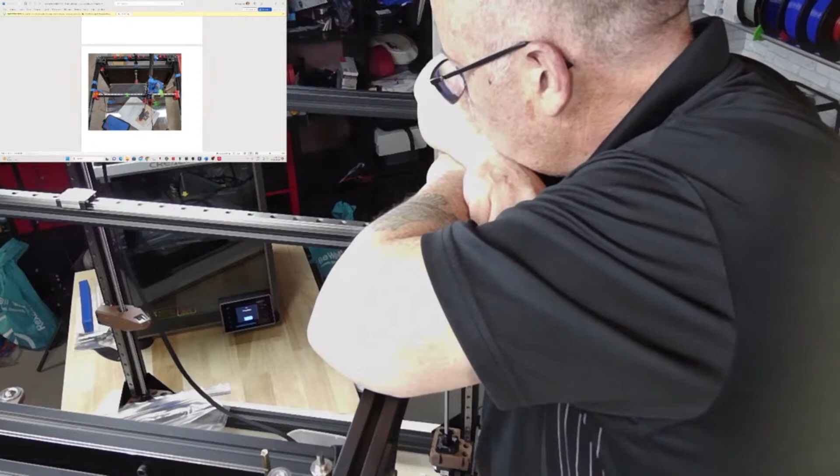That's going to go back through that one. Yeah, I need to... comic relief, I know guy. Jeez, I'm not having a very good time of this here right now. So this one's got to go back through here, and then the lower belt's got to come back through here, front and back, like anyways.

So I need to get my zip tie here again. Where'd I put it? Right here. Okay, love the belt part, the running the belts, yeah, who doesn't love it, right?

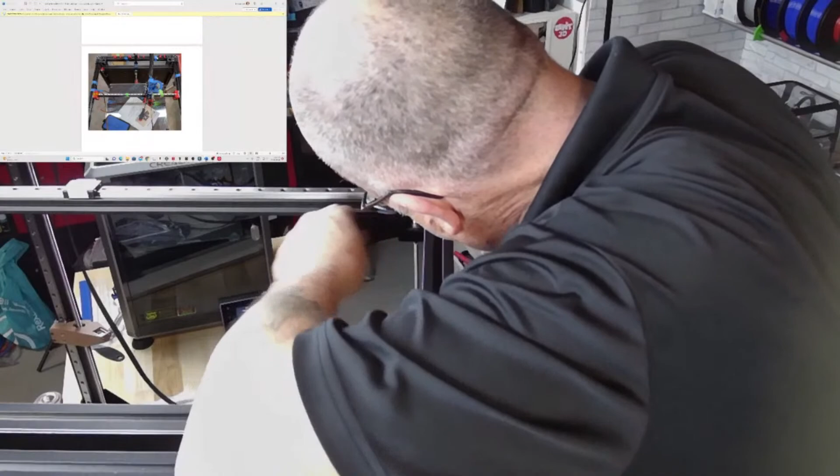Okay, there we go there, let's see if I can get this through here. Oh, come on. Patience, Tim, patience. Running belts is never easy. Could be worse. If it was easy, everybody would do it.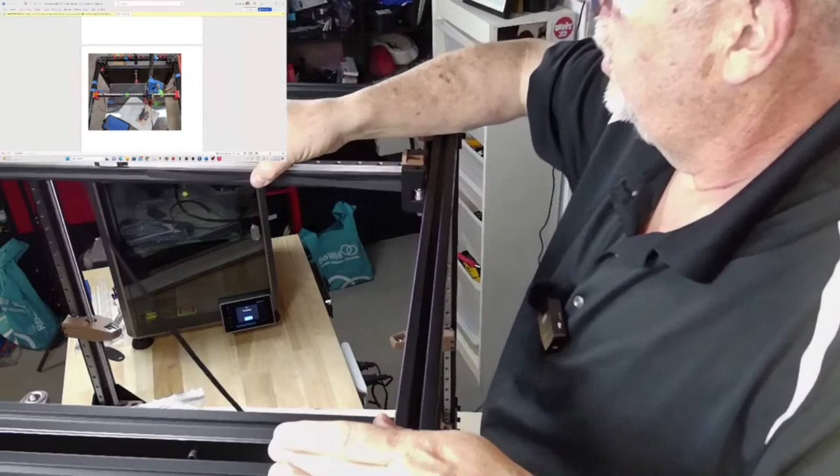There we go, okay, we got that belt through, thank goodness. So we got this one through. Okay, I guess where I'm confused, so that one's through there. Now, I guess where I'm confused is where this one goes next. This came around the front lower idler, and this is going to come back, come through here.

No, it's not. What the heck? This has got to come back through the back somehow.

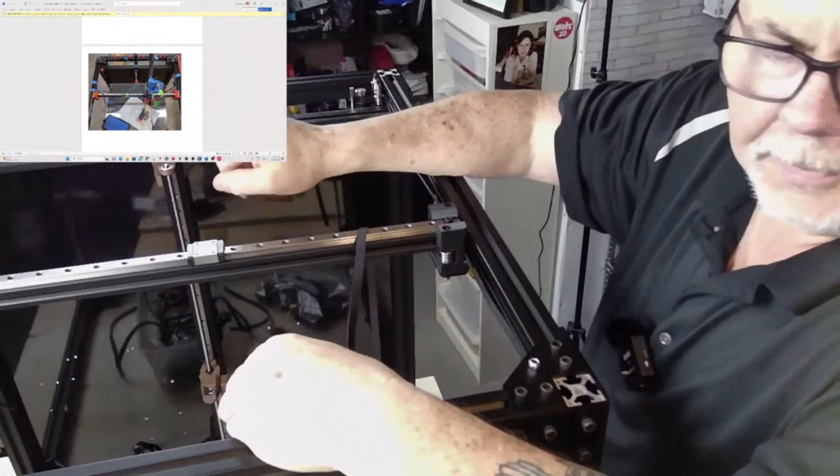I'm just confused about this one belt run right here, and I don't know why this is confusing me so much. It shouldn't be. Anyways, let me just get down off of this.

What I'm going to do is cheat. I'm going to have a quick peek at the actual belt path documentation in the RatRig manual. Why do they not show a belt path?

Bed arm assemblies. I don't want the bed arm assemblies. The belt path should come after the X-axis assembly. Okay, let's do that. I know it might be a little bit different, but it's going to at least open my eyes. Okay, here we go.

Bear with me 1 second here. This is crazy. I did look at the diagrams and the instructions, I did, but it still confused the crap out of me.

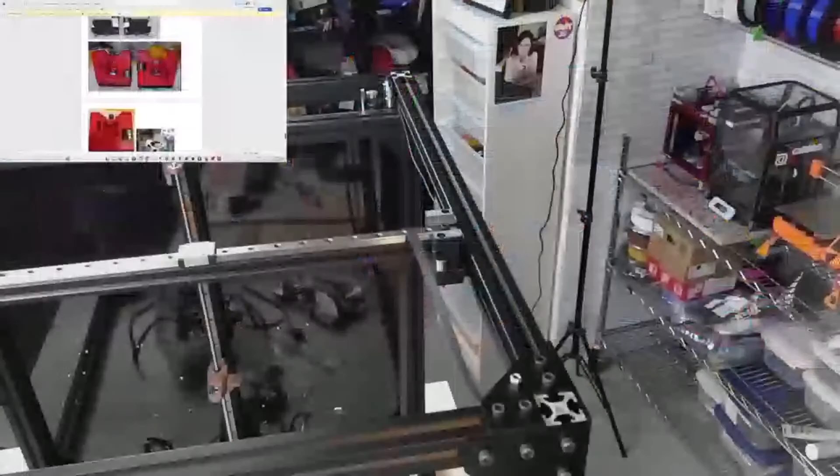Okay, I think I got this. This one comes back around from the front and comes through here and out here, like so.

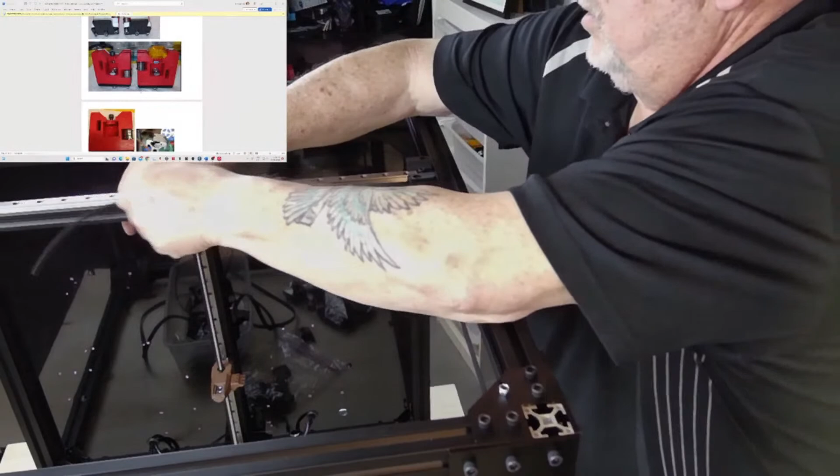So that makes sense there. Although, why is that right though? That we're running the geared side of the belt against a smooth pulley on this one? It has to be. It's the only way it can work.

Okay, so that's the lower belt run. Except this corner has slipped up a bit. Oh, it's because of the bearing stack. We don't have anything on top of the bearing stack yet, that's all. Okay, there we go. There's the lower belt run.

Hey, Jose, take care. See you later.

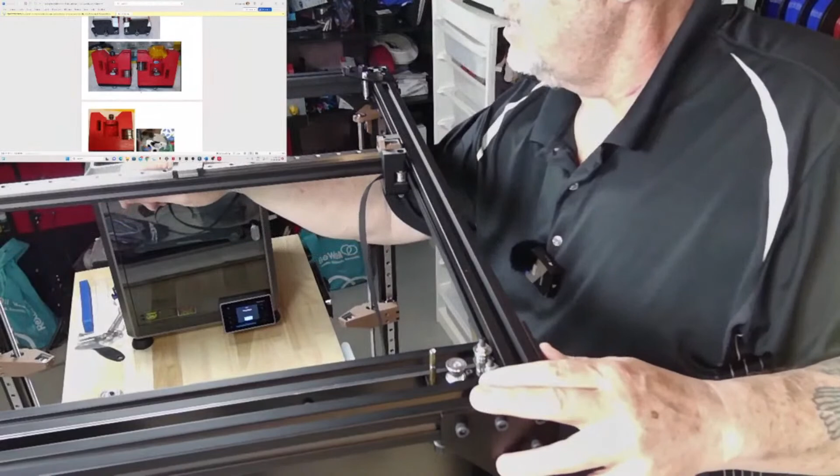Okay, now I think I've got this right. We have one coming out the front of the X, one coming out the back of the X. And we're going to have the same in the upper, one coming out the front, one coming out the back. Now it's kind of making more sense to me.

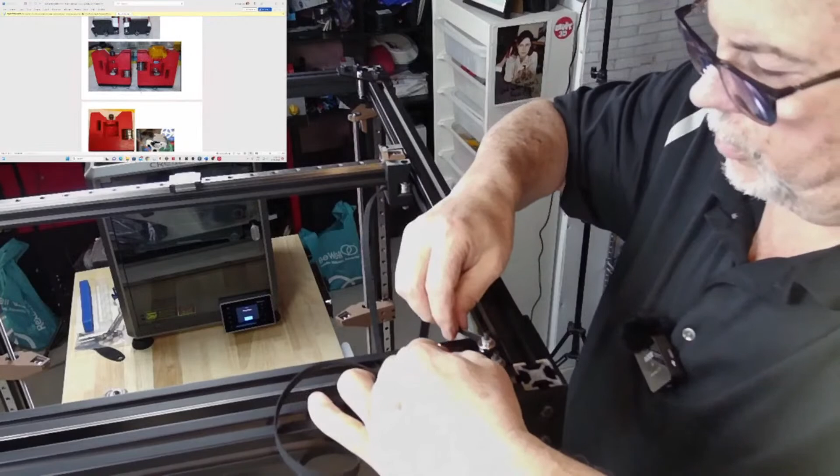So let's get the upper belt run. So come through here, around the extruder motor and like this. There's that one.

So what I should do is, as I have that put on, I'll put the plate on in a minute. There we go.

Okay, the lower one came through and the upper one's going to come through here. Oh man, slivers. Belt slivers. So you're going to come up through here.

There we go. You're going to feed through here. Where did I put the zip tie? Right here.

Actually, might not even need the zip tie on this one. I probably will. No, I don't. Okay, you're going to come through here, like so.

You're going to come back through here, out here, like so. So there's the lower and upper meeting in the middle here.

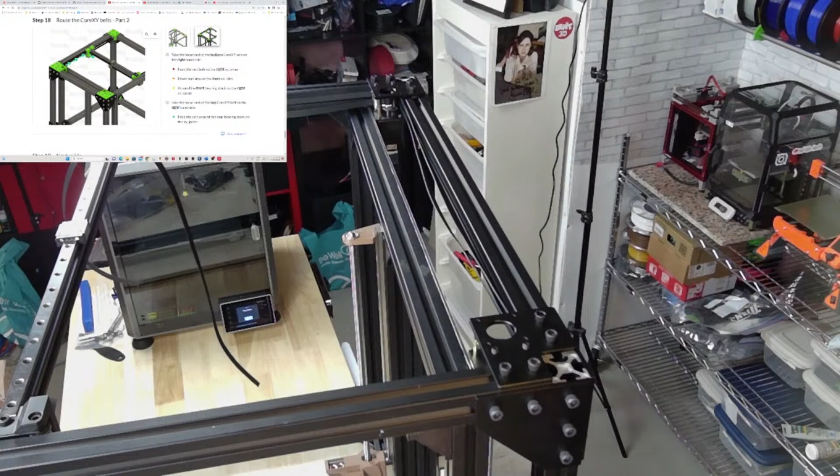Okay, so let's get these on. Let's just go ahead and do this corner. It's going to need the yellow, and I'm going to need my wrench set. Okay.

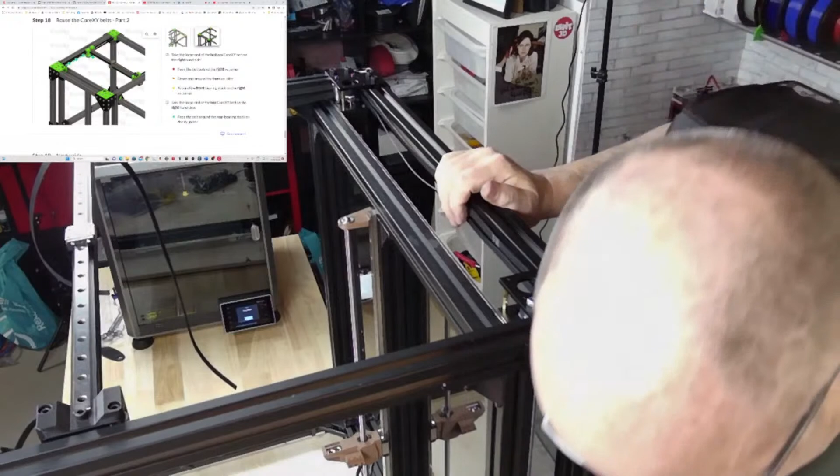Did you get any in the 3.1 kit? I don't think so, no. Okay, so we need - I think that's an 8. I think I need an 8mm socket for that. That's exactly what I need.

Okay. There's that one. Okay, now I can tighten these down.

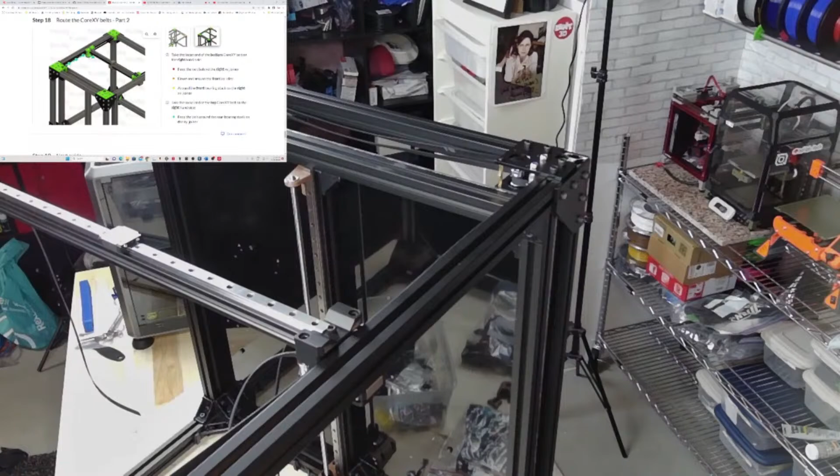We got to grab another one of them M3 8mm button heads. Okay, so we can go ahead. Thank goodness. Come on up here and we can go around and finish this side. Cool.

Cool. That way I don't leave the job undone. Okay, so under here. I am feeling blind. Come on. There we go.

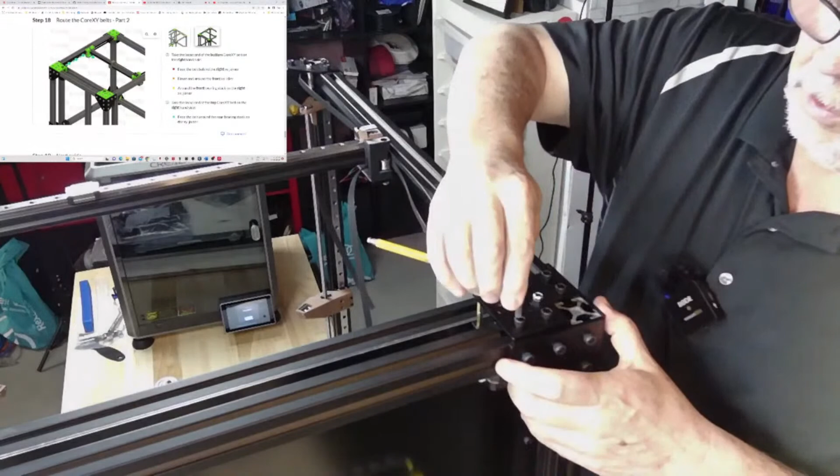Okay, one. And here's the other one. Okay, those are done. Tighten these up.

Okay, and then I drop that other screw. Of course, wouldn't be a stream of mine if I didn't drop a screw.

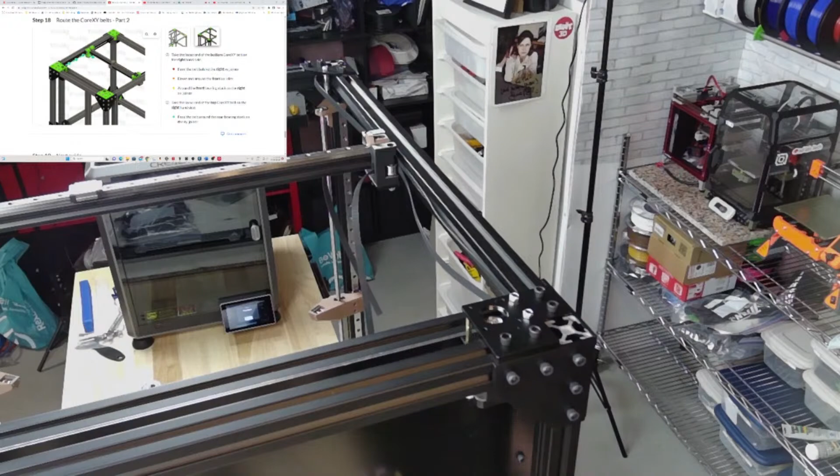And this corner. Bend that piece into place. There it is. And done. Looks great. So we will check them for alignment next.

And yeah, wow, that was, I guess that's quite the task for a 2.5 hour stream. We are at 7:20, good timing. Well folks, I got to put my tools away and call it.

Not sure why this was not the original design, the metal parts top and bottom. I know, this is so much, okay, other than the fact that I made it look stupid hard, which it shouldn't have been. I had the brain fart with the belts, okay, I'll admit. But yeah, otherwise that is a simple way to do things for sure.

Where did I put? There it is. There. Where did I put my little socket? Oh, right in front of me. I like to put things away. That way I don't lose them.